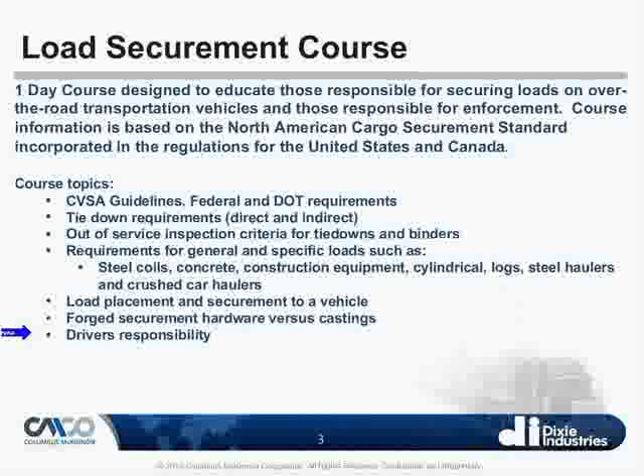So obviously we want to make sure that the driver recognizes these things. Simply stated, proper cargo securement is basically making sure that the cargo doesn't go anywhere. Doing what it takes to make sure my load stays on my trailer.

To do this, it also helps to understand forces. We have a lot of different forces that act on these trucks as they're driving down the highway. We have forward momentum. We make a turn, and all of a sudden the load shifts. The trailer can flip over, whether it's right or left. Going up hills, loads can start sliding back towards the back end of the trailer if it's not held down properly.

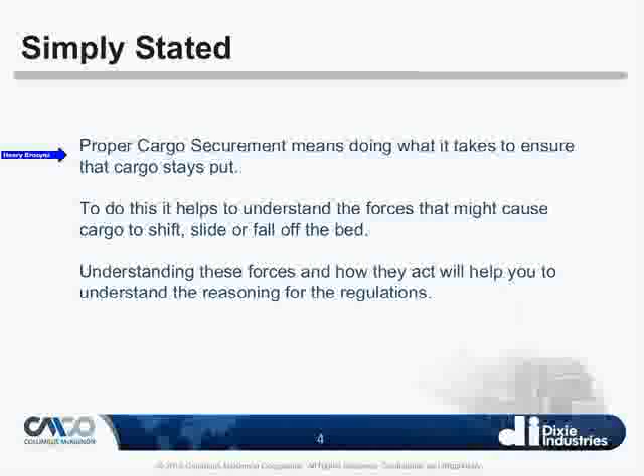We don't advise people to put loads on trailers or trucks and strictly rely on coefficient of friction to keep it in place. It's not enough. All right, high loads on trucks, high centers of gravity, tips. We can have trucks tip over when the loads are up too high. People need to understand what these forces can do. We have to understand what the term center of gravity means. It's the CG. In the rigging business, riggers have to understand that.

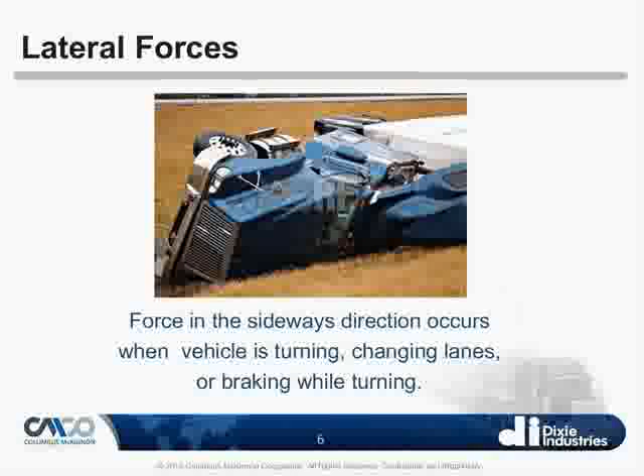All right, so how do we properly secure cargo? We can use the vehicle structure, such as a bulkhead. This will keep the cargo from moving forward. Securing devices: binders, straps, chain tie-downs, ratchet binders. We go over all of these in our class, and we tell people how they're built and what their designs are.

Vehicle structure, blocking, bracing: drivers will have lumber on the truck that they can nail into the trailer bed itself to help secure loads. It's perfectly acceptable, but there are guidelines on what kind of lumber you can use, the species of wood, and whether it has any defects. A lot of people may not know that there cannot be any knots in the wood. It cannot have any cracks. These are things that people sometimes take for granted. They don't even think about it.

Many times I'll see trucks with loads held in place by a skid or a 2x4 from the hardware store. They went to the shipping dock at the company where they're picking up the load and asked the carpenter or whoever's building the crates, hey, can you cut me a 2x4, 3 feet long? That's not acceptable. There are guidelines for that. The anchorages used must be strong enough to withstand these lateral forces. Again, those forces, sideways, forward, backward; they need to be in good working order.

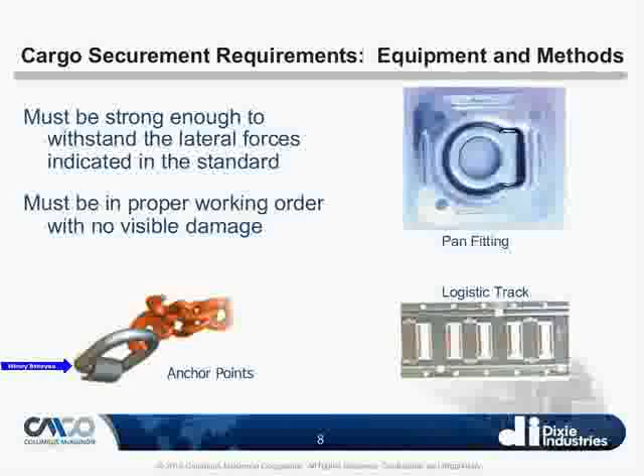And then we actually have anchor points. Those are usually held on low-boy type trailers. They'll have a D-ring in the anchor point. There are many types of securement devices. These are just a few. We also have different types of ratcheting devices as well as other securement devices.

We have chain, we have web straps, we've got grab hooks, we've got binders, winches, blocking, bracing, I've covered those, shackles. Not too many truckers use shackles, but they do. They'll usually use them when they're holding down something like some construction vehicles. Only reason why they do that is because a lot of construction vehicles will come with eyes on the bed of the vehicle or within the frame somewhere so they can attach the shackle to it, and then they can attach either their binder to it or their chain or strap, whatever they happen to be using.

Stake pockets are, I shouldn't say normally, but often used. Nothing wrong with that, but they can be used. Ratcheting webbing ratchets. Kinedyne is a big company that manufactures ratcheting web tie-downs. These things are perfectly acceptable to use, and they need inspection. Not all of these come to you in perfect shape when they're on the truck. Weather takes its toll. Sunlight takes its toll on synthetics, the webbing straps.

I'm not sure if a lot of people understand that UV degradation on webbing straps is very, very important to understand. There's an organization out there called WSTDA, which oversees web straps. They write standards for them, and they did a study several years ago on polyester as well as nylon straps, and found out that over time, and I'm not talking 6 months, I'm talking maybe about a year to, I think it was 3 years if I'm not mistaken, that strapping lost anywhere from 30 to 60% of its breaking strength, just being exposed to the elements, period.

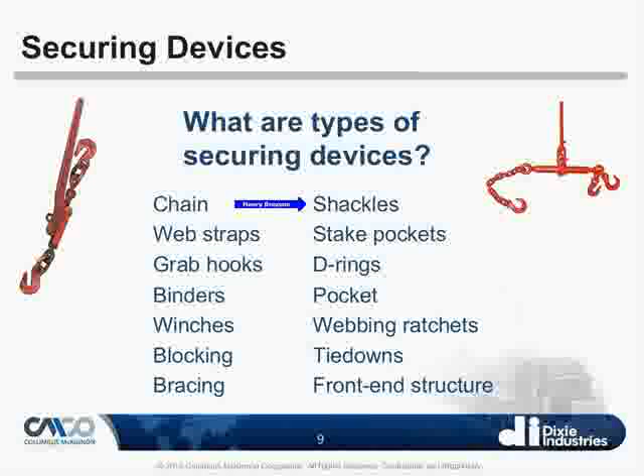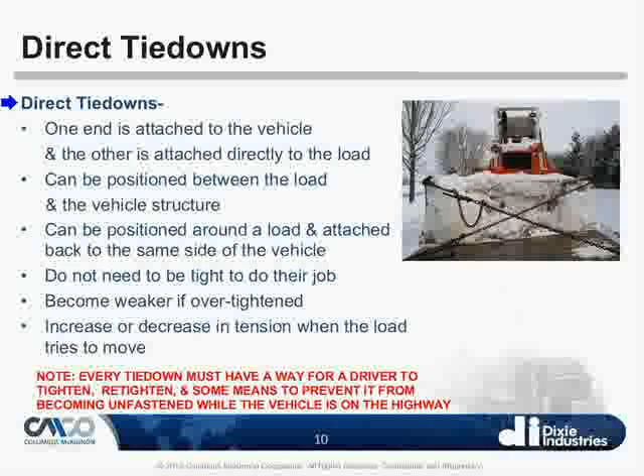There was no load put on these straps whatsoever. And that is available on their website if you guys want to go there and check out the details of those experiments. But there are basically two types of tie downs: direct tie down and indirect tie down. This is an example of a direct tie down. You can see how in this case the chains with the lever binder are attached directly to this piece of equipment. I tell people, it's kind of like going up to someone and giving them a handshake. You're grabbing a hold of whatever that device is.

Versus an indirect tie down, it's kind of like giving somebody a hug. If you give them a hug, you grab them, wrap your arms around them. That's what an indirect tie down basically is. There are advantages to each of them. Direct tie downs don't need to be tight. They can become weaker if over-tightened. They increase or decrease in tension as the load travels down the road. And with an indirect tie down, you're relying on friction to hold that load in place. It can move around on you. It stays pretty tight throughout the trip of the load on the truck,

but it can become a little loose if the load starts to settle. For example, logs coming out of the forest as they get cut, truck gets loaded up on the deck, truck travels through the woods, through a dirt road, gets to the highway. By the time it gets to the highway, I can almost guarantee you that some of that load has become loosened. It's not that the driver didn't tighten it down the first time. No, I'm sure he did. It's just bouncing and moving throughout that short distance from the deck to the main highway. It will become loose. He has to stop and retighten all of his tie downs, because I can almost guarantee you that every single one of them will be loose. All right, that would be an example of an indirect tie down.

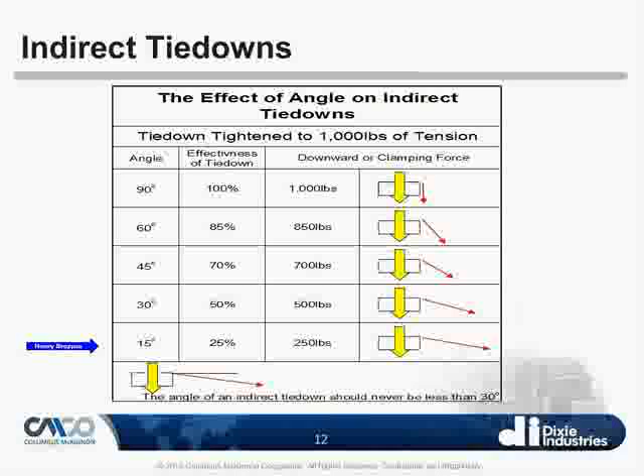It's very important to know what the working load limit is of the equipment that you do have on the truck, whether it be strap or chain tie down. We need to know this. That'll help us with the load. To determine the maximum amount, you have to look at the strap or the chain. The strap has to have some kind of identifying mark on it, who made it, what the working load limit is. Chain will have some kind of markings on it as well, and it'll be graded, and for that grading, you can go to the manufacturer's website, or you could contact me. I'll be happy to give you what that working load limit is of that particular piece of chain.

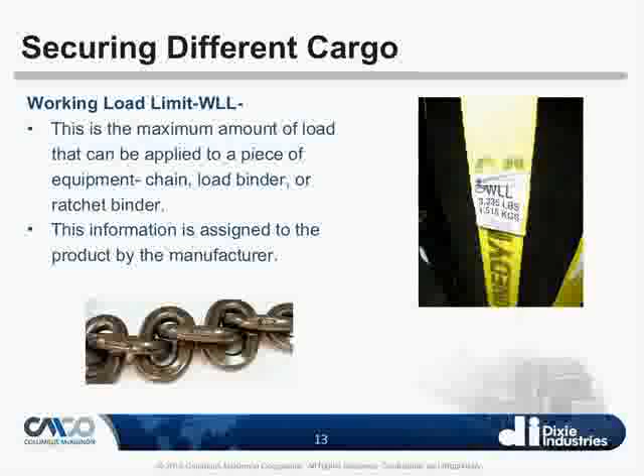There are documents out there, there are charts out there from different manufacturers that will help you distinguish what the grade is. Tie-down equipment is marked. All chain is marked. Grade 30, grade 43, grade 80, grade 100, whichever one you happen to be using, they are all marked. You should be able to read these markings.

The reason why you want to be able to read those markings is if you tie down a load and you know you had, say, grade 80 chain, and it's good for 3,000 pounds, and through time, rust, weather, wear, we wore away all those G80 marks. Well, if you know that was G80 chain, you know it's good for 3,000 pounds. The problem is when you get pulled over by enforcement, they're going to say, I don't know it's grade 80. I'm going to take it down to grade 30 because I know that's the minimum it can be. Now you're not carrying enough load securement to satisfy the standards that are out there.

So it's very important to make sure that you keep the equipment up to snuff. You don't want to start using equipment that's not properly marked. Not only that, but if the markings are already worn off, chances are you've had it for quite a while because those markings are pretty well ingrained in the material. If you've worn them off, you've had them for a while, or you've done a lot of work with them.

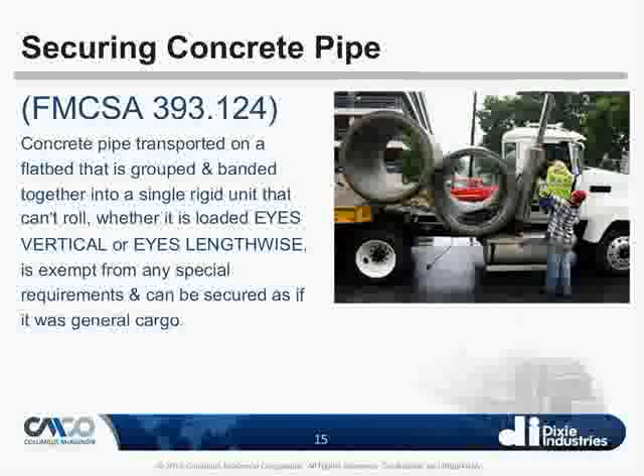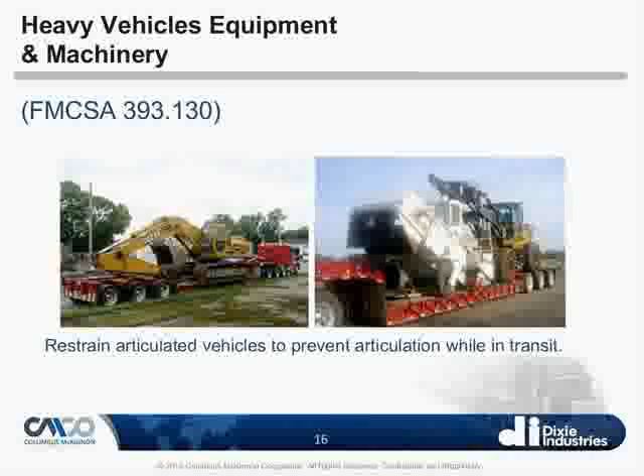And we cover that. We also cover the securement for construction vehicles. Crawler cranes, dump trucks, excavators, bucket loaders, backhoes, things of that nature. We cover all of that. In the end, the truck and the load are the driver's responsibility once the truck leaves the dock.

Banding, steel banding that's put on, say, for example, pipe, shrink wrapping, loads onto pallets, those are not securement devices. We can't adjust those. We can't put more on it when we're halfway through our trip. Those are not securement devices.

The driver during pre-trip, inform the carrier if the packaging is not adequate. If he doesn't feel that the packaging or the product that company just put on his vehicle is going to make it to the destination, then you know what? Take it off. Don't take it out that way. That is your decision. You can think of the driver as the captain of the ship. He's the law when everything comes together on that truck.

Adjust the cargo as needed. Obviously for the pre-trip, he's going to place it on his vehicle how he figures the weight is going to be best distributed. Within the first 50 miles, he can check it, adjust it as needed, or when the duty status of the driver changes. You pull into a truck stop or meet at a convenient location. This driver doesn't go any further.